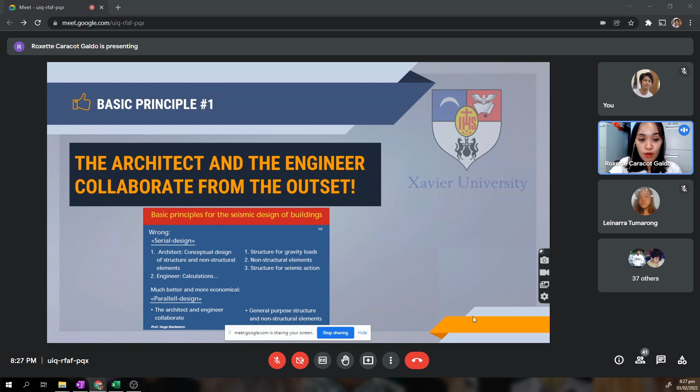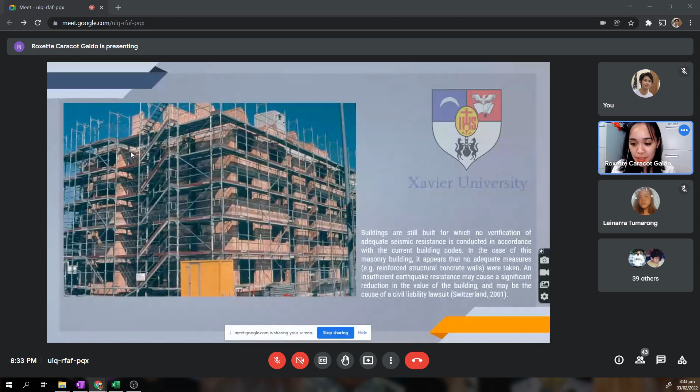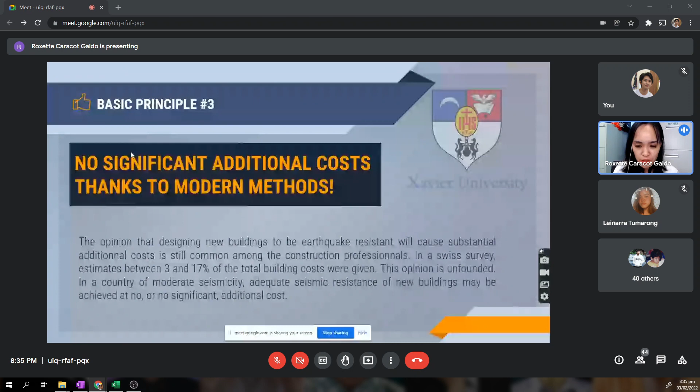So we have basic principle number 3. Basic principle number 3 says no significant additional costs thanks to modern methods. So unsa may mga modern methods? These are methods present today that were developed through research and study of the behavior of buildings during earthquakes in the past. They've already studied the effects of earthquakes on their buildings, and they were able to develop methods that would help them produce better buildings. Such modern methods include ductile structures, the capacity design method, or the ultimate strength design method. So sa inyong RC, unsa inyo gigamit, working strength or ultimate?

Dili ta sure. Okay. So most likely ang ultimate strength design, or capacity design method, or LRFD, load and resistance factor design. LRFD usually ang tawag. So kani nga mga methods makatabang sa atoa in designing our building to be able to resist earthquakes. Although the incorporation of these modern methods will not add to the building cost. They just help you design your buildings the better way. So it doesn't mean that if you adopted modern methods in the design of your building, it will add to the cost.

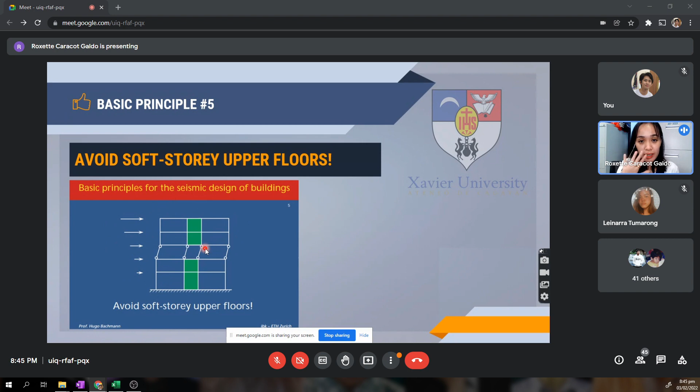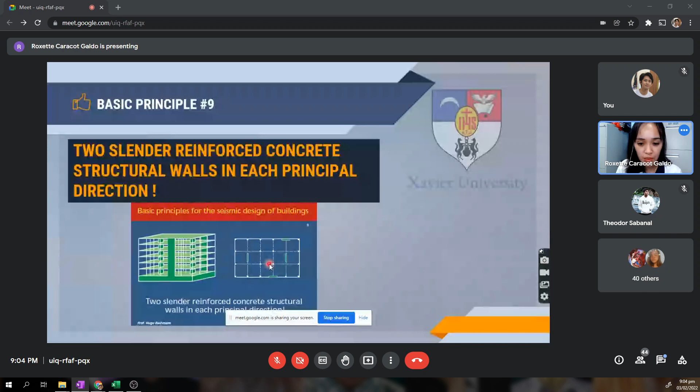So, okay. So shear walls are not structural masonry walls, meaning the reinforcements are similar to that of the column, no? More siyang column, pero lapad lang. So it will add stiffness to your building. In case of an earthquake, syempre your building will tend to twist, no?

Kaya syempre ang earthquake load dili lang man na siya mo-apply sa left side of your building or right side of the building only or at the front of your building or at the back. So it could be nga sabay silang tanan, therefore your building will tend to twist. Motuyok siya. So your structural members such as columns and walls and your footings will experience torsion. So the incorporation of shear walls will add stiffness to your building, minimizing the effects of torsion.

Imagine nailapad kay dira nga column. So syempre inig-twist sa imong building kay stiff man siya. Therefore, it could bring a good effect to your building. So, kaysa sa katong walls lang, structural masonry walls, CHB lang siya, although reinforced, it will not serve as much as your shear wall will.

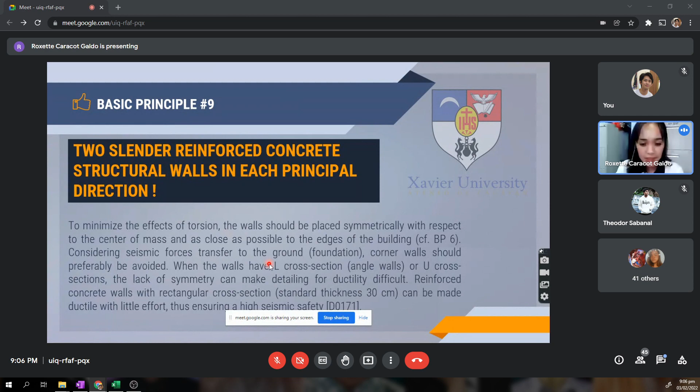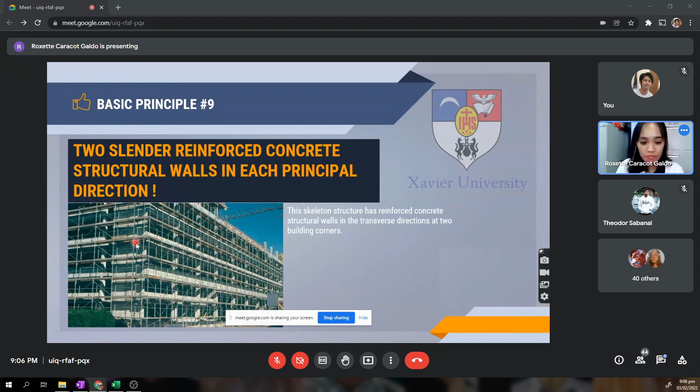All right. So that would be all for the part 1 of the seismic conceptual designs of buildings. I'll stop sharing. Okay. So on the next meeting, we will be having part 2 that will comprise the basic principles from 10 to 18. So we will have 4 parts for seismic conceptual designs of buildings. So 1 now, 2 next week, and then 3 and 4 next week before we start with our project for the computation of earthquake load.

So do you have any more questions? Yes, ang Principle 8 ug 9, naipon siya sa part 2. Ang PDF sa part 2, mag-start siya sa basic principle number 8 to 18.